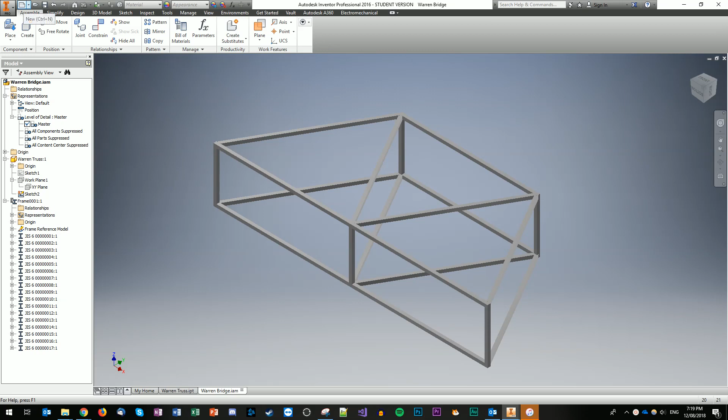If we go up here to the new file, we want to create a new working drawing from the ANSI in millimeters, which will look something like this. So you'll have all your parts down here, the type and all that sort of stuff, and then we'll draw the measurements that are relevant and add some balloons as we go. So this is basically what we'll start with.

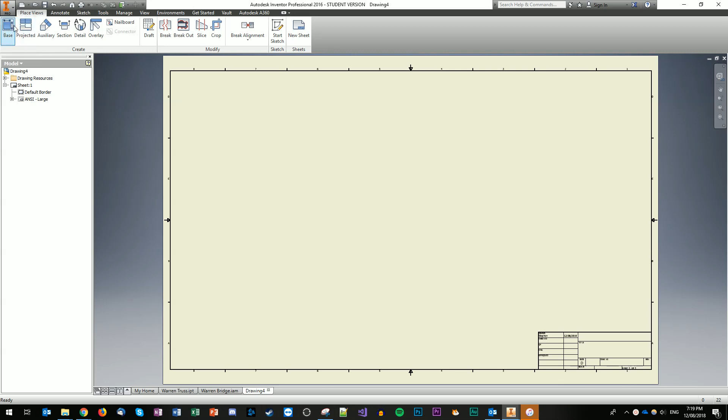Now this is where it's slightly different from what normally you would do in Inventor. Normally you will go base view and just place in directly the original document that you would have had, which would have been up here in the original file. So in Warren Bridge it would have just been that. Now when you do that, it will actually affect the part files as you later go down the track. So I'm going to show you a little bit of a hack to get around that.

What happens is with my file, it'll make a folder with all the things inside of it, and basically you'll open that and it'll have all the frames that you need. Then at the very top, there's an assembly file, which is like the raw assembly file of all the parts. So we actually need to add that as the base model, and we'll have the different views and all that sort of stuff come from it.

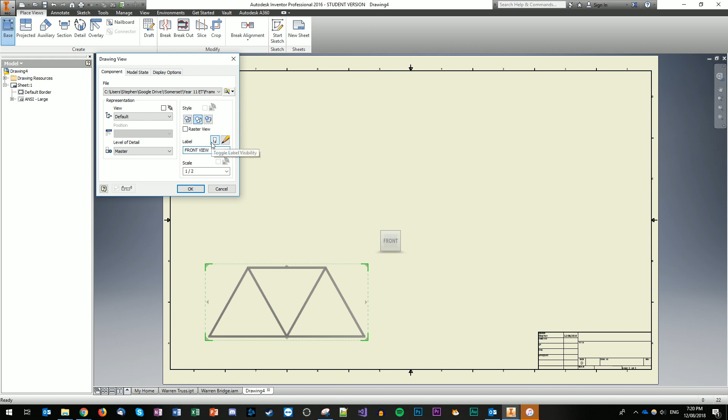From here, we're going to call that the front view, and we're going to enable it by pressing the little light bulb. Then we're just going to edit it so that we get rid of the scale view down the bottom here, so just delete that. Otherwise it puts in the scale each time, which we already know is going to be at a half, and it should be already listed somewhere down here. So we'll go OK, and then OK. So there's our front view done.

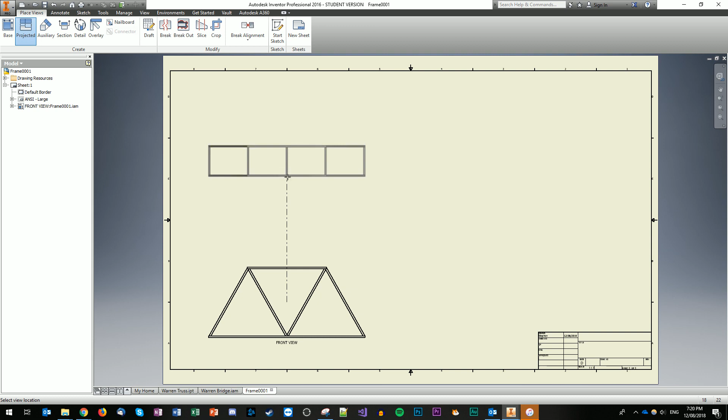We're now going to project from that, so we're going to click on the view. As we click, basically it will place a projected view all in alignment with it, no matter where you sort of move this around. So we want to do the front, probably the side, and then we want a nice isometric view so we can get a clear image of what we're going to build. Something like that. Awesome.

You right click and then go create, and that will create it. Now you notice that this is the only one that's been labeled, so let's just go around to each of these views and label it properly. Right click, go edit view, and we're going to go, this is the top view. We'll enable that, and then we'll delete the scale, because we don't need to see that each time.

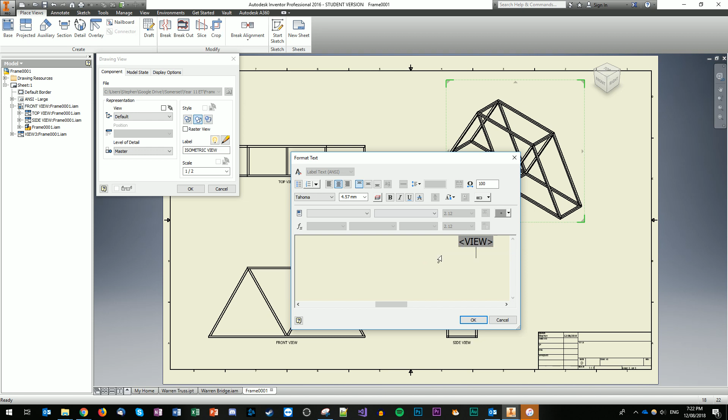This is the side view, so we're going to go right click, edit view, and we'll go side view. We'll put the light bulb on, and again we'll delete that, and then lastly we'll come up here. Then OK, and then last one we'll go up here, edit view, and we'll go isometric view. We'll put the light bulb on, edit, delete, then OK, and then OK.

Also with this one, because it's the isometric view, we want to make it look a bit more solid. So this is the hidden lines been sort of put in place, and we want to make it the shaded solid view so it gets a real nice image of sort of what our balsa bridge is going to look like. So we go OK, and that just makes it look a little bit more sort of professional. And you can see all the members coming together with all those notching that we did before.

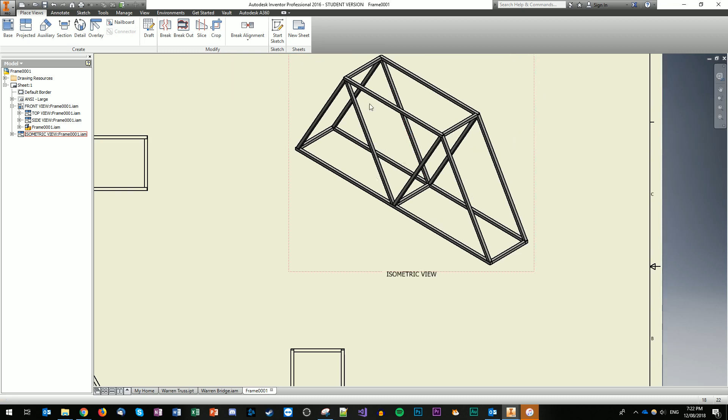Right, so now we've done that with all the different views, and we've got down here the scale and all the measurements and all that sort of stuff.

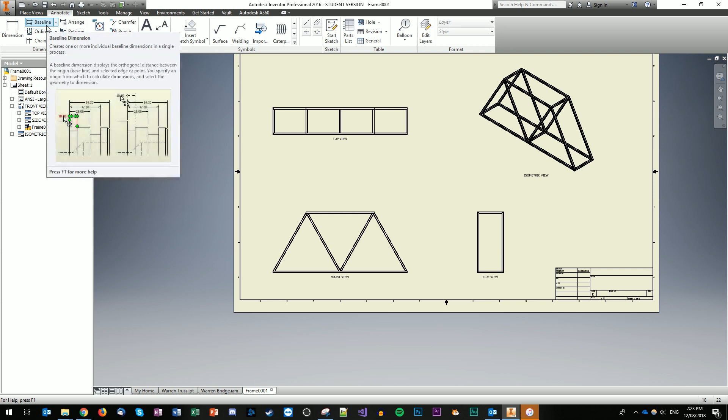We can come back up here and we're going to put the dimensions in. Now with the dimensions, we need to put anything that's relevant to when we're building this, because this is the whole point. We want to make sure it's easier for us to look at this working drawing and put together what needs to be done.

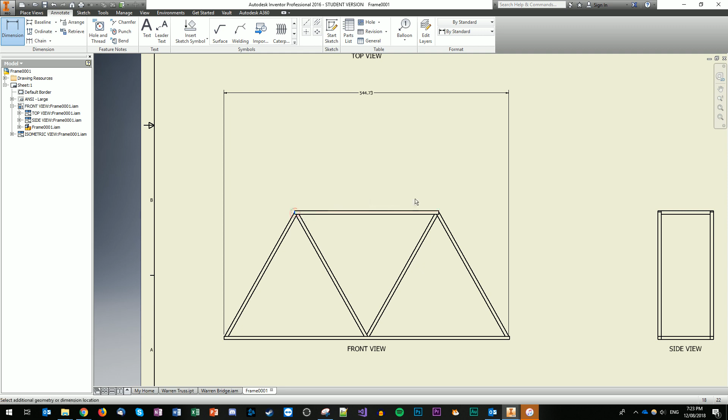So for this, I would first get the main measurements of how wide the whole thing is. So maybe something like this, and let's put that up as high as possible. Then probably how wide this top part is, it's probably going to be pretty important.

And then you might want to have where any of these critical points have been joined. So you might want to go from here and measure across there. And similarly here to here. And then also maybe the intersection point down the bottom.

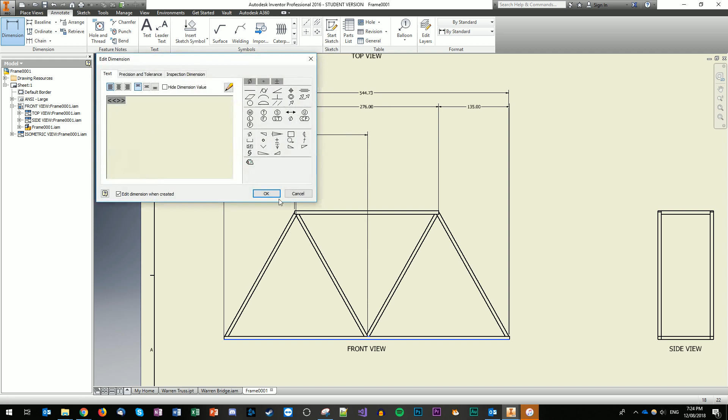Now notice whenever I'm doing this, not actually - oh hang on, let's undo that. That's not looking so sharp. Go again from the dimensions from there to there. And this time we'll go from the dimensions from there to the tip. There we go, that's better. That looks a little sharper.

And then same on this side. And then we can also do that, and also probably want to get that center point there as well. So let's go down there, just so we've got a rough estimate of where anything critical is going to happen.

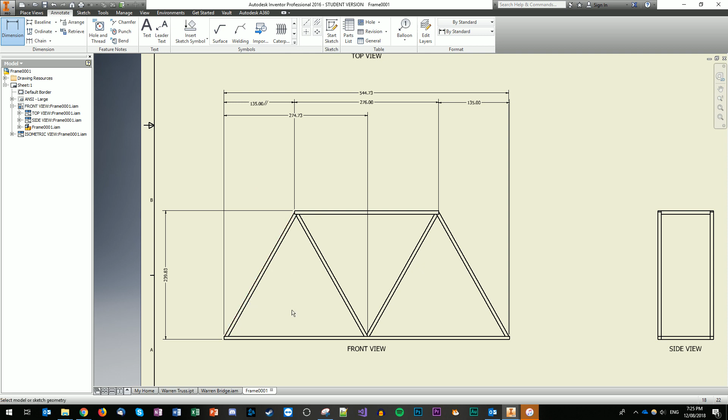And again, it's just roughly so that you know as you're building, these are the things that are important. Probably also need to know how high the thing is, so that's going to be useful over here. And there's not many other vertical things that are really that important. So that's what we'll do on the top, the front view.

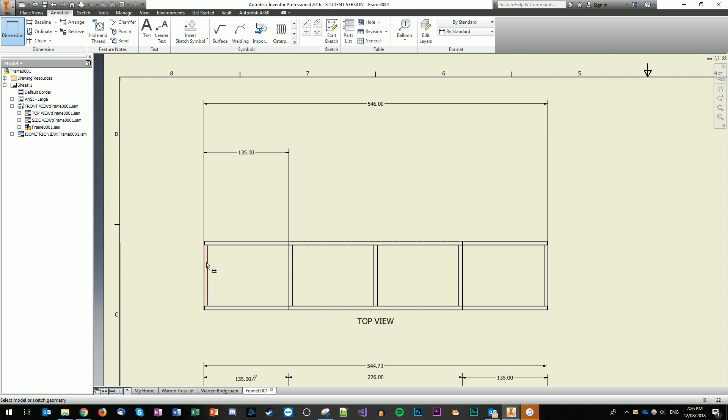And then come up to the top view and do something similar. Let's just move up here, and we'll go through that same process. So we'll go there and right up to the top. And what we'll do is measure off how far it is each time to get a good estimate between each of these bracing points along the bridge.

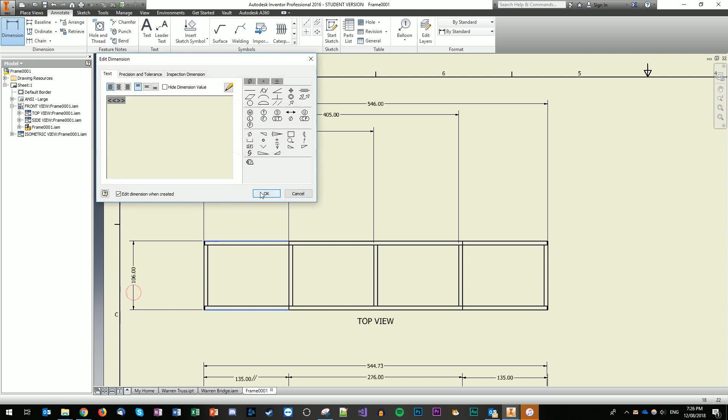And then we'd also probably want to know how wide the whole bridge is. So we'll go there, there, and we'll go down this way. Oh, let's get rid of that.

Okay, and then we'll now do that last bit on this side too, so probably want to put the dimensions like that. And then we might do the inside, so we've got that clearly labelled. And then also how high our little guy's going to be.

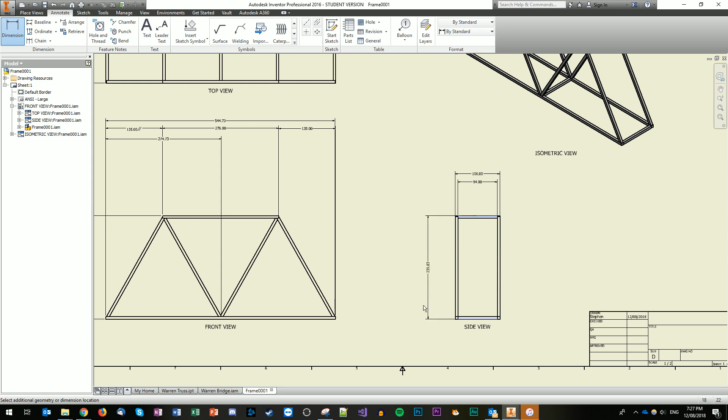Something like that. Now this is a bit of an art - you might want to play around these measurements so that it looks a little better. But those are the main ones that I could see were important when putting this together, so I can see exactly where I need to place them.

Now notice that I can only ever put the dimensions either to the left, above, and also to the right of here, but I've left that gap. You need to play around with that to make sure you can see all those measurements. You can never put the dimensions underneath the view - the simple reason is because you've got the view name underneath, so that's a big no-no. Also just try to make sure it looks balanced, what you've done.

So now that I've got those measurements there, I might also move this up a bit more, just to give a bit more breathing room around the area.

Okay, so then the next bit that we're going to do is we're going to look at the parts list. Now the parts list allows you to have a template of all the things that you need to have when you're building your final model. So if we go to parts list, same thing, you'll need to click on the frame - so inside that little hack that I showed you.

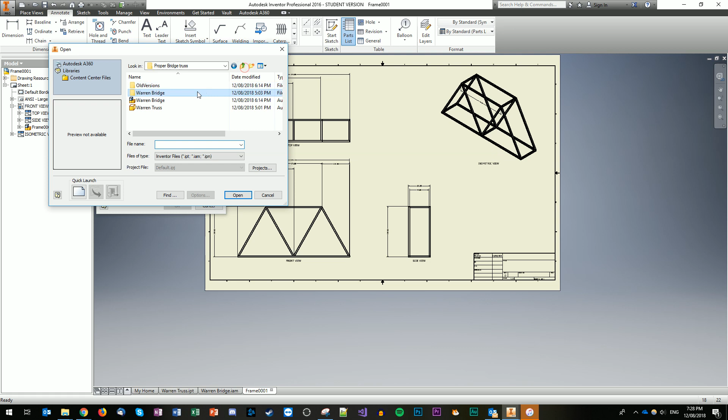Not just the normal file, go inside Warren Bridge, frame. So when we place that, we usually place it in the top right and bottom left. Because we've got the isometric, we're going to try and put that in the bottom right, just like that. Sorry, bottom right or top right.

Now if we zoom in on it, you'll see that it has the item number, so what type of member is going to be used. That gives you the total quantity, so how much of that member you need, the part number, and the description. Now there's a lot more useful things we can get into that will help us when we're actually building.

So if we double click on that, it brings up the tables we're dealing with, and we're going to modify this. On the top here we can choose the column. Part numbers are probably not so useful, so we'll remove that, and we're going to add in a few other things. Probably worth taking a screenshot of this and making sure you do something similar.

So the first step is the item quantity, which tells you how many of the actual particular cuts you need. So we're going to have item quantity, and then the base quantity, which is the measurement of just one of the units. Then the total amount of that measurement, which is basically those two times together.

And then this is where it gets a little bit more interesting. We're going to put the standard in that we had before, the description, and then we're going to put the stock number in as well. Now this will make more sense when you see basically what all those different values are. And then we'll go OK.

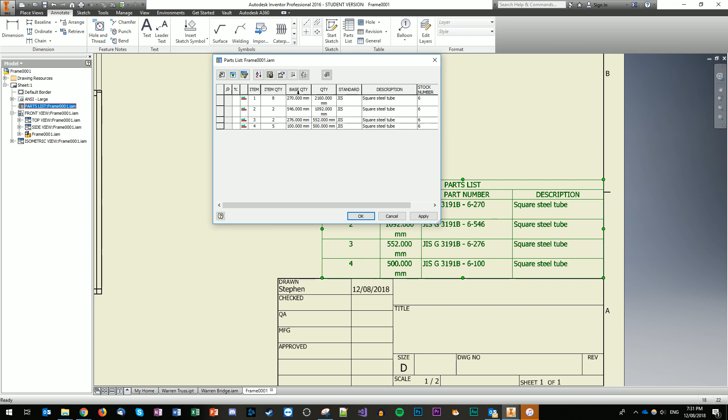Now we can actually set this to make it look a little bit neater. Item quantity is fine, base quantity, yeah that's reasonable, so we can keep that. The quantity itself, let's bring that out a bit so it fits in better. The standard, let's change that, and instead of that let's call it the library. Just go lib, just to save a bit more space, because we don't really need all that.

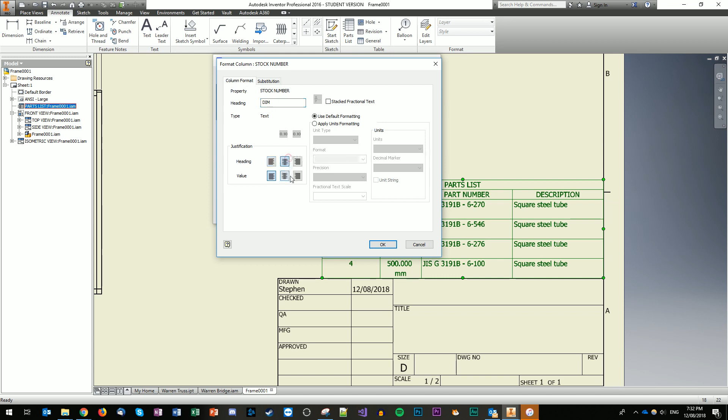And instead of description, let's change that to type, and we'll center that. And instead of stock, we'll go dim for dimensions, and we'll center that as well, just to make it look a little bit neater. So now we've got the item quantity, the base quantity. Instead of quantity, let's change that, let's go total QTY, which gives you the total quantity.

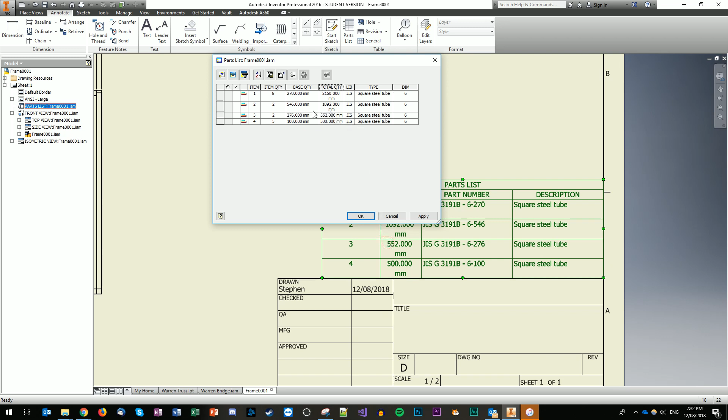So base quantity for measured quantity. Yeah, that looks better. We'll just give it a bit more space there, and bring that back in.

Let's see what happens now if we apply that and go OK. So now we've got those measurements there, looks a little bit neater, and we can drag that back just to be in line.

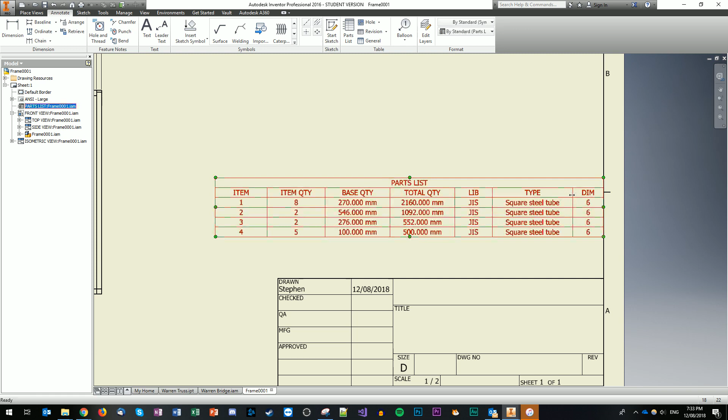It didn't look like it formatted that one. Sorry, we'll go back here, format columns, and we'll center that guy as well. Okay, might as well do the changing in here. So to bring that back, bring that library right back. Total quantity, base item,

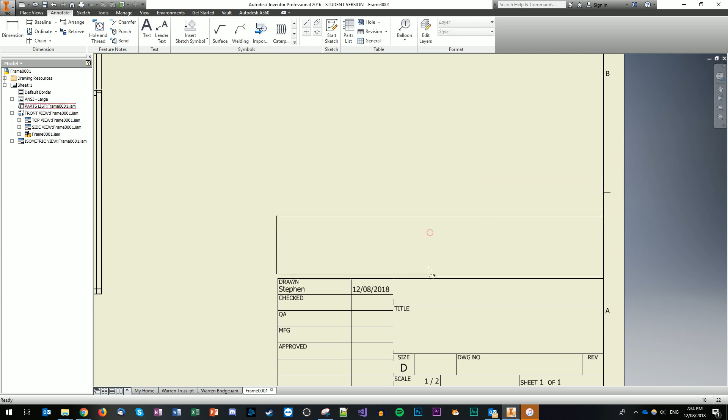item quantity, and then item. Awesome. So now that we've got that, we can put that in the corner and line it up. Fantastic. So there's the measurements.

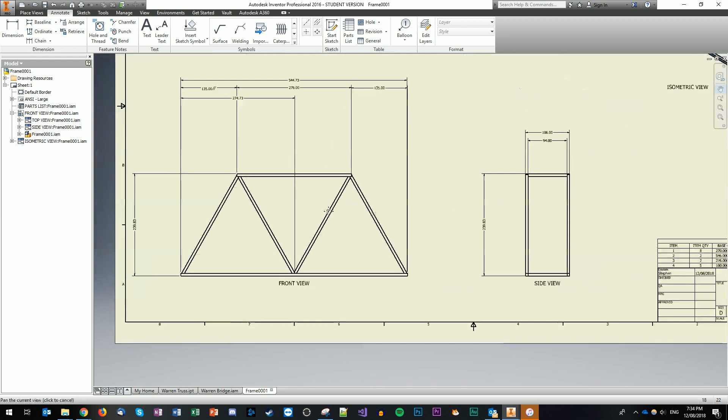Now, here comes the cool part. Because each one of those is labeled as a particular number, we've actually got a balloon method that we can use. So what the balloon method allows you to do is you go through balloon, and it will literally put a number attached to each one of those members. So if we go balloon, just to give you a real quick example, and we click there, and then we go continue, puts a 1.

So we know that needs to be a type of part 1, which is a measurement of 270 in general. You'll just have that part measured out of 270, and then you can play around with the notching and all that sort of stuff as you go.

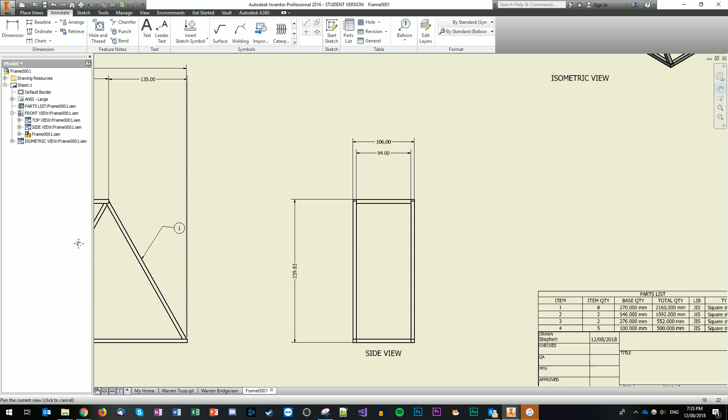Okay, so just to fix that up properly, let's do it properly. If we go back, as general, we try to make this look as neat as possible. So one way of doing it, which I found kind of cool, is basically click outside, and then move to the right. That's why I gave a lot of space on this side.

And see how I've kept a diagonal and then a straight line out, so then it's very clear what that particular member is. So then we'll come down here, do the same sort of thing, come out to a line, then make sure it's all sort of lined up and kosher.

There we go, and we're going to continue. So that's a part 2. And then we'll go over here as well. Actually, instead of doing that, let's press B for shortcut for balloon, and put it out here.

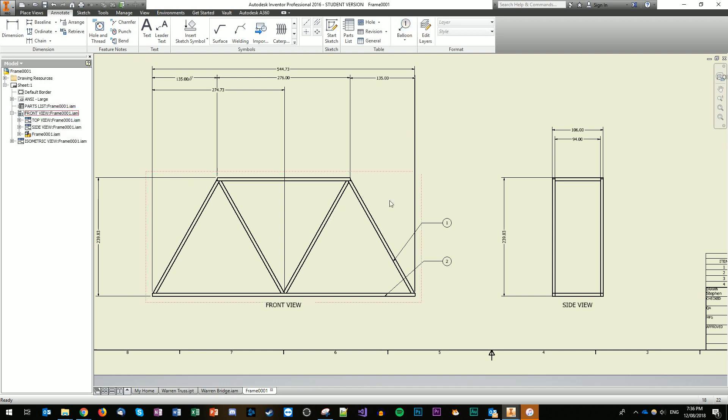This is where it's sort of a little bit finicky, but it's worth it. By putting those straight lines out, it really identifies what the balloons are. Whoops, I stuffed that one up, let's go again. So there, and then try and get as straight as possible, and then back a little bit up. Of course, did that, let's go again.

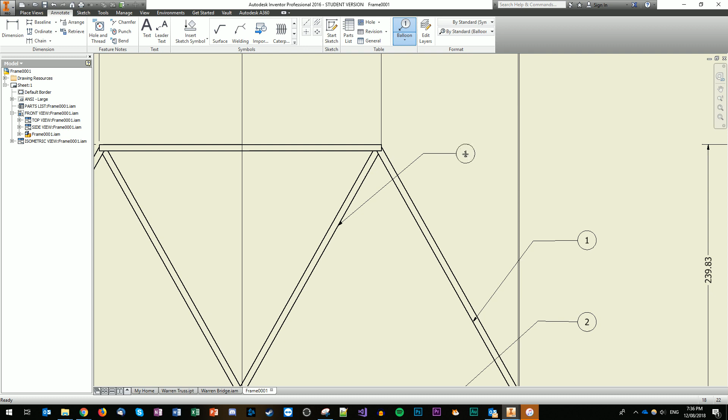There we go, awesome. So they're all part 1. We'll come here, keep with that sort of theme. That's a part 3. And then we'll put a couple on this side as well.

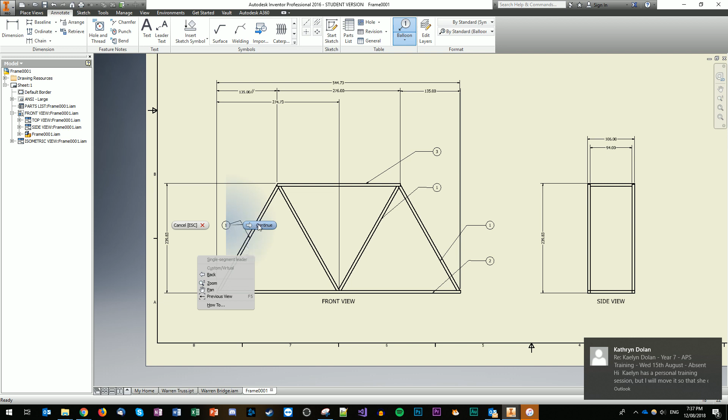Awesome. So then we can do exactly the same over here for the side view. Just going to go over this way. There. See how it all sort of aligns it for you.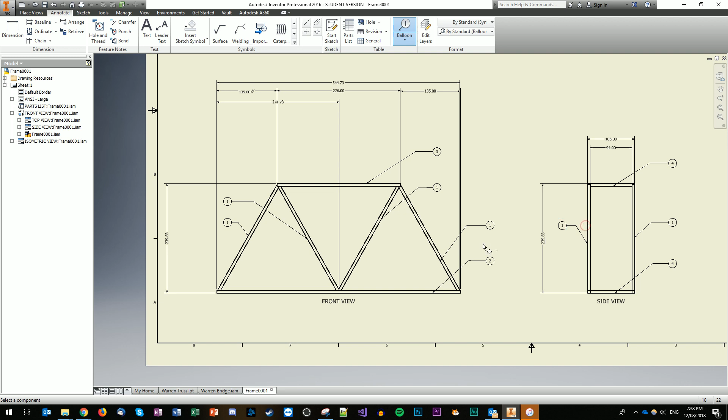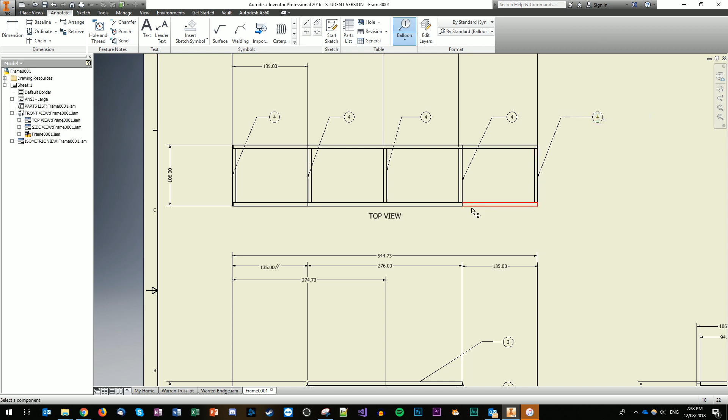And then we'll go out here just so that we got some sort of consistency. That's all those parts. And then we'll go back up here. And then it's probably not worth doing those side panels, because that's exactly the same as what's down here, and we've already sort of put those on and it'll get a little bit overwhelming. So that's all the ballooning, dimensioning.

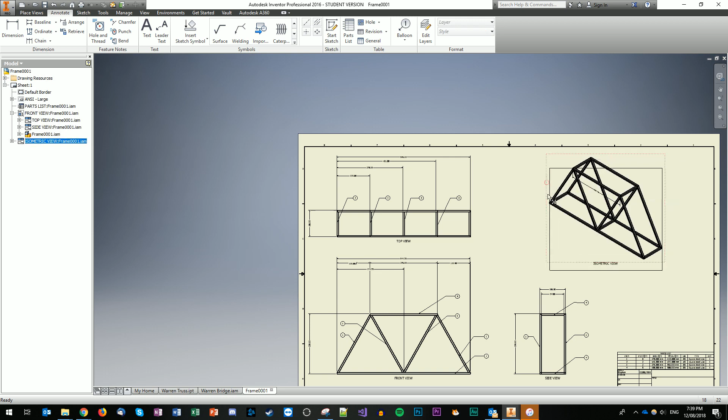Go back and deselect. Probably we can move that a little bit more in the center, like so, and there we go. So there's our final product of our working drawing.

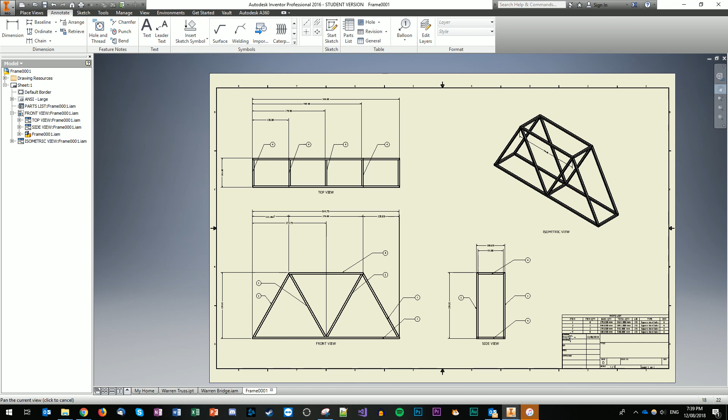Gives you a very clear indication of all the different parts and how to put it all together. Down the bottom here, it's also got all the base units with all the different measurements, also when it was made, which is a very good indication of how far ahead you are with your assignment. Awesome. So you'll need to be able to produce one of these and print it off. I look forward to seeing your working drawings of your final prototype before you build. Thank you very much.